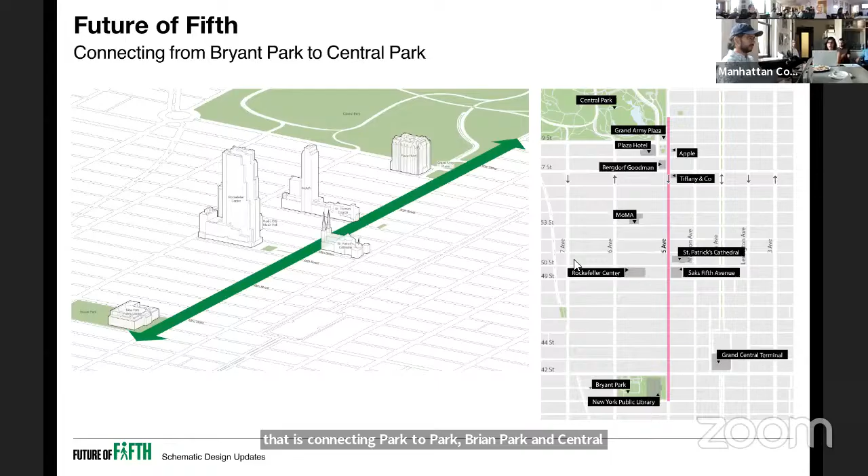Which we like to think about as a project connecting park to park, Bryant Park and Central Park, as one boulevard that we hope can be green and sustainable, as well as iconic and pedestrian forward, as Madeline described. This whole project really came to be as a result of the Making New York Work for Everyone action plan, or the new New York panel.

There was an interest to revitalize Midtown after COVID. And in doing so, there was obviously an interest to revitalize economics, to revitalize retail—you really need to look at public space. How can public space become a catalyst for a lot more investment, and also bring people back into a space that's a lot more comfortable than perhaps the plain sidewalks we see today. So as part of the new New York panel, there was a proposal to make Fifth Avenue, from Bryant Park to Central Park, into a vibrant corridor for pedestrians by expanding sidewalks, improving lighting, and adding more seating.

Out of that initiative is what formed the Future of Fifth public-private partnership, which is all of us here, which, as Alexis mentioned, is a mix between city agencies and the four BIDs that oversee the area, to ensure that we're doing a project that balances everybody's wishes and desires while still addressing some of the corridor's key concerns.

As Madeline mentioned, our first and foremost goal is to prioritize pedestrians. And that is because of the metrics that we see here on the screen. Fifth Avenue's pedestrian volume is on par with the busiest places in the city and around the world. On a given day, during one hour, on one block, we can see over 5,000 pedestrians. That is the image represented here, which is very familiar to all of us.

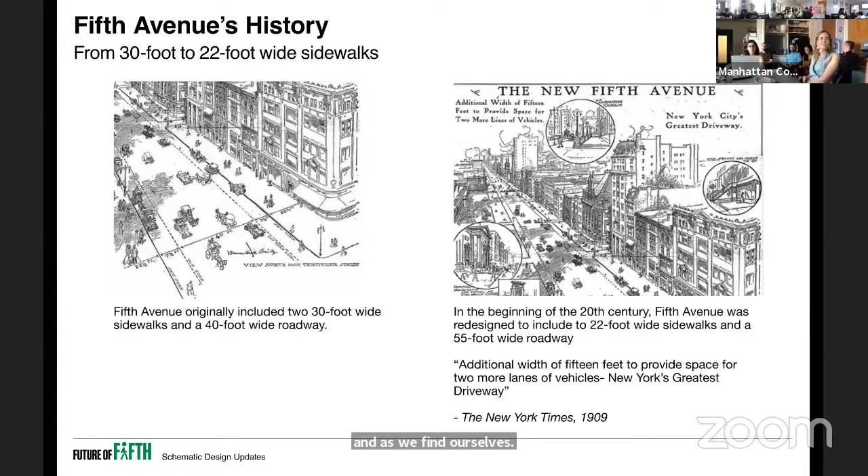And as we find ourselves in this century, we want to revert some of that and bring space back for pedestrians. So looking at the actual proposal with all of that background in mind, this is the existing layout for Fifth Avenue. Just as a reminder, I know you're all extremely familiar with it.

So on the left-hand side, this would be the west side of the street. We have 2 bus lanes. The one along the curb picks up and drops off passengers. The one in the center is an express bus lane. And then we have 3 vehicular lanes. As a reminder, the ones on the far right, or the east, are the more stop and go traffic. The roadway is 54 feet wide and each sidewalk is 23 feet.

But the reality is that because those sidewalks hold bus stops, light poles, trash cans, mailboxes, and other things, the effective clear space for pedestrians is only 15 feet wide, which is very, very small for the amount of pedestrians we see today.

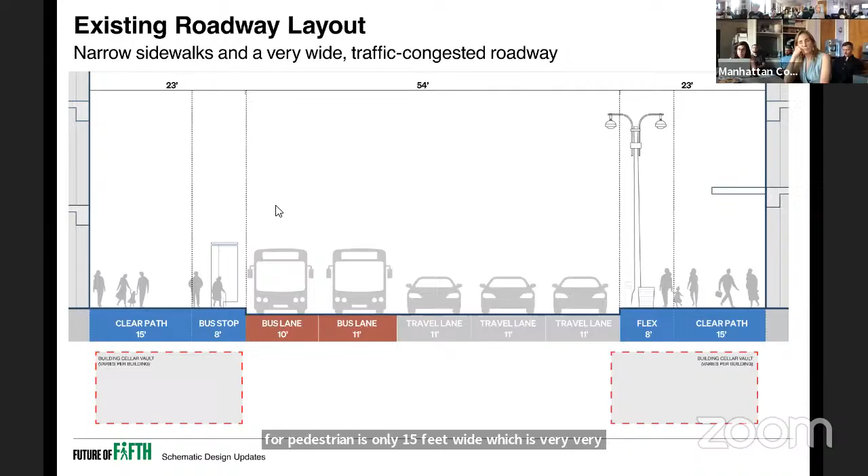So in addition to counting pedestrians, as I mentioned before, we also decided to count everybody else using Fifth Avenue, just to understand how we can rebalance the modes of travel.

So the proposal, after a lot of testing—this didn't come very easily—the current proposal is to reduce the roadway to 33 feet and to enlarge the sidewalks by 10.5 feet each. That would make them a total of 33.5 feet.

The roadway will have a curb lane along the west side. This works exactly as it does today. Either buses pull into that lane to pick up and drop off passengers, or cars making a right-hand turn use that lane, and that will remain the same.

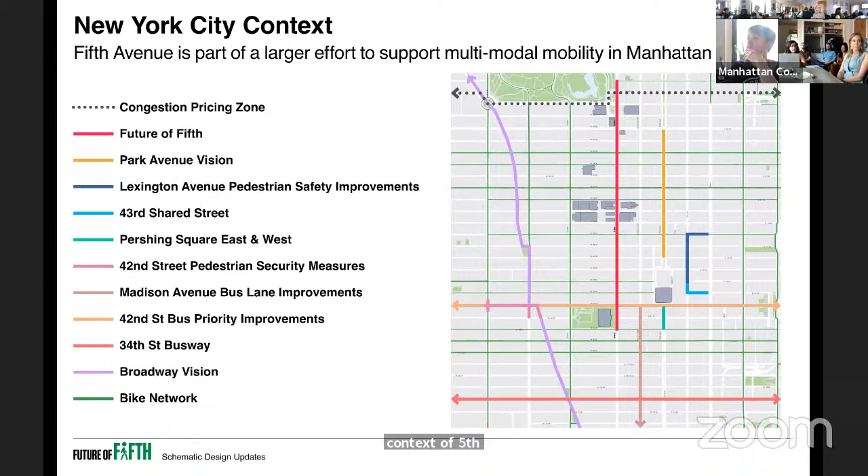Now, keep in mind, the renovation of Fifth Avenue and this proposal to prioritize pedestrians and reduce the roadway comes as part of a larger effort by the city to support multimodal mobility across Manhattan. Here we have the list of different projects emerging at the same time to prioritize public transportation or pedestrianized streets, and ensure a much more multimodal city. DOT is here to speak to those at large in the context of Fifth Avenue, but we want to point out that we are one of many initiatives occurring throughout the city.

Now, this is not all about practical ideas and metrics and counts. We also want the space to be beautiful, iconic, and recognizable. As we set out to develop the design, one important thing for us was to really understand the architecture of Fifth Avenue and think about a streetscape design that felt unique to the place.

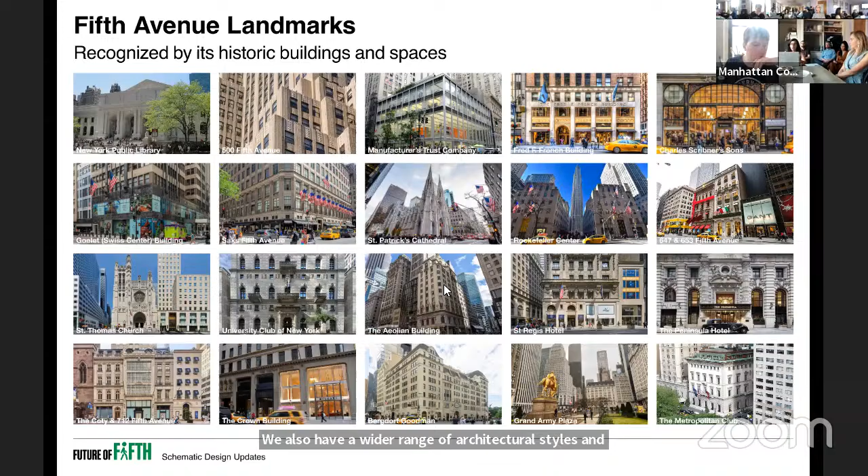We started by looking at all the many buildings on Fifth Avenue. We have a large amount of historic and landmark buildings, with a wide array of architectural styles, materials, and periods. However, what became prevalent to all of us is that what really calls your attention the most about Fifth Avenue today is a uniform materiality. We see a lot of paving with blue-gray tones, mostly granite or concrete sidewalks, and a lot of beautiful Art Deco buildings with Art Deco motifs, also bronze and gold materiality.

So as I'm about to present the proposed designs, the idea is that they're truly grounded in that iconic architecture. Again, we're not doing a project that's only practical to alleviate challenges, but one that's also looking to the future, creating an iconic boulevard for New York City.

So to start talking about the design, this is our key plan, or 20-block vision plan for Fifth Avenue. We're starting at the southernmost edge on 40th Street and extending the renovation to 60th Street. What we recognize out of this project is that we want to create a uniform streetscape, a space that all feels contiguous, but there are also very unique areas along Fifth Avenue that we want to highlight with the design.

So we developed this idea of categorizing the spaces into connectors, piazzas, and gateways. Connectors are the majority of blocks today characterized by retail, mostly 42nd Street to 49th and 51st to 58th. They're extremely important for the livelihood of Fifth Avenue, but you cross them quite quickly. They don't feel like a sense of place. They're needing something to anchor them.

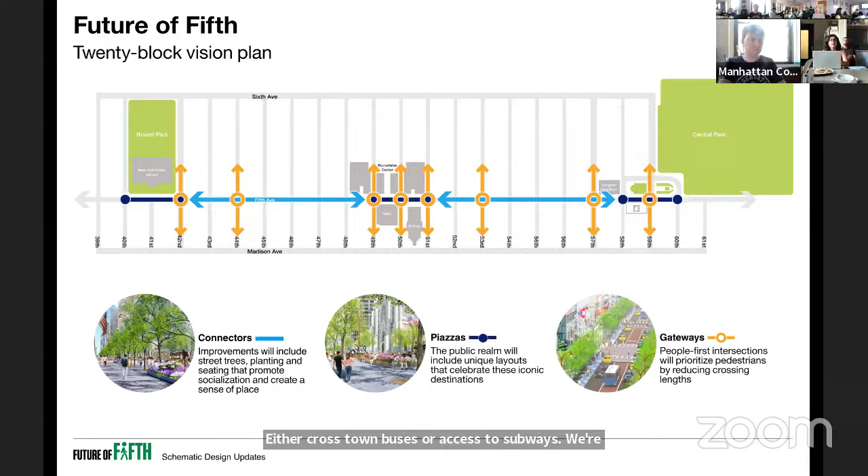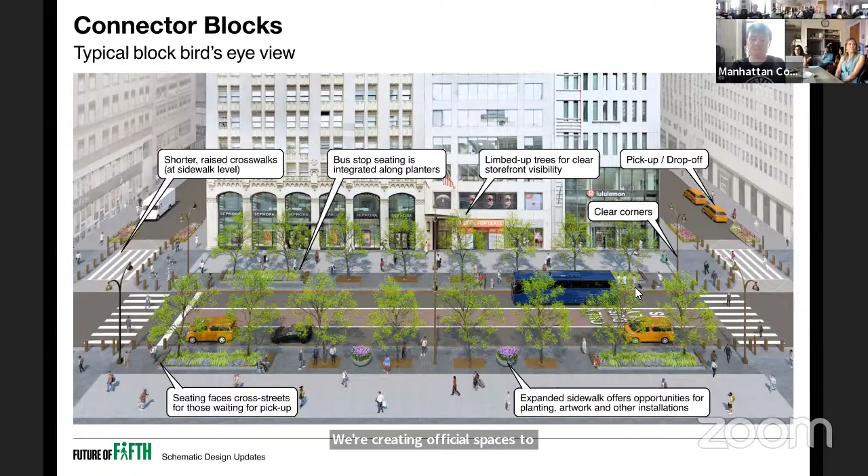On either side, you'll notice how the corners are now bulb-outs. The idea is that we're able to bump out the sidewalk to reduce the crosswalk length. We're also raising the crosswalks to be at the same level as the sidewalk to facilitate mobility throughout. We're lining the corners with bollards to ensure safety on those corners where most people gather. The rest allows the streetscape elements to provide that sense of protection while beautifying the street and not creating more clutter to impact pedestrian traffic. You'll also notice at the top of the image, where we see the taxi cabs, we're working with DOT to create designated pickup and drop-off areas on the side streets. Learning from some of our retailers who have told us this is where people usually get on and off, we're creating official spaces to ensure traffic flow on Fifth Avenue is effective and people can safely access the area.

Another key thing that we've heard from a lot of stakeholders is that Fifth Avenue kind of quiets down at night. Many storefronts close early, but also it feels unsafe. Lighting is uneven—some sidewalks are very, very dark, and some storefronts are a little bit too bright to overcompensate, which is what we see on this image here.

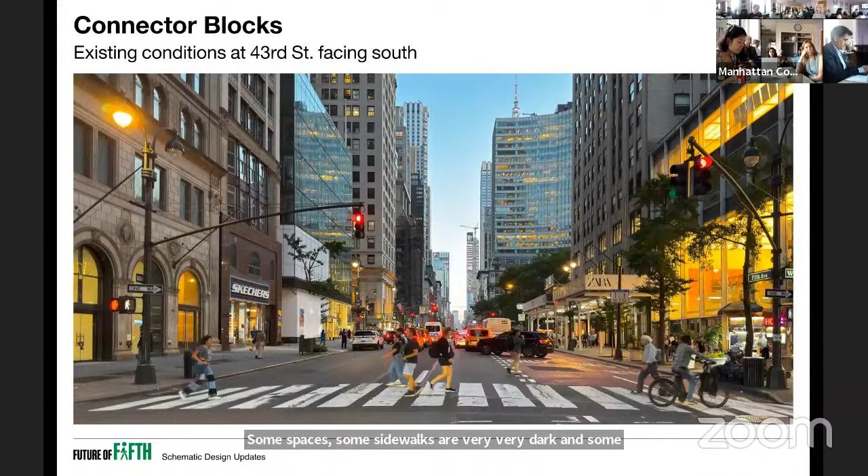We will be upgrading all of the lighting with new light poles that are dual arm. The idea is that they're able to evenly illuminate the sidewalk and the roadway, so the entire width of the corridor feels like one. Again, we're creating uniform lighting that alleviates that issue and hopefully encourages businesses to remain open a little bit later into the night.

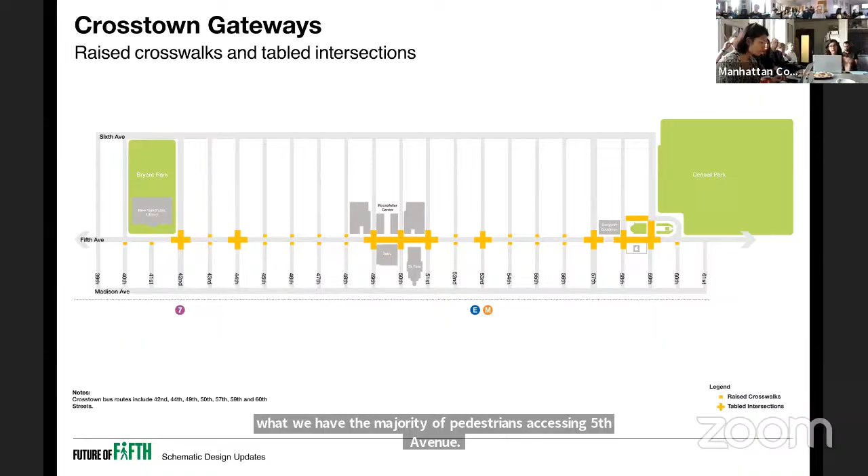Another key initiative is to create safe access points for pedestrians. On this map, we are raising all of the north-south crosswalks in these orange boxes to the same level as the sidewalk. We're also creating areas where we raise the entire intersection, shown as plus signs. This is where we have the majority of pedestrians accessing Fifth Avenue, so we want the entire space to prioritize pedestrians. Metrics show that when vehicles need to go up and down these raised crosswalks, they slow down speeds by 10%, which is really important for this corridor.

In addition, we're proposing two segments that will have curbless streets, where the roadway is at the same level as the sidewalk. That would be between 49th and 51st Street around Rockefeller Center, and between 58th and 59th Street between Grand Army Plaza and Apple Plaza. These are spaces that today are a lot more active for pedestrians and also get closed during the holidays for special events, so we want to facilitate that and accommodate some of the uses that already occur.

Looking at how all of this comes together, under number 2, if you follow my cursor, that's the raised crosswalk at the same level as the sidewalk, so vehicles need to go up and down, reducing street speeds. We see these bump outs again to reduce the length of crosswalks—reducing them between 4 and 11 feet, depending on the width of the side street. On the corners you see a dedicated pickup and drop off area, allowing for better traffic flow along Fifth Avenue, with corners demarcated by bollards to create a safe space for pedestrians while still allowing for easy crossing east, west, north, and south.

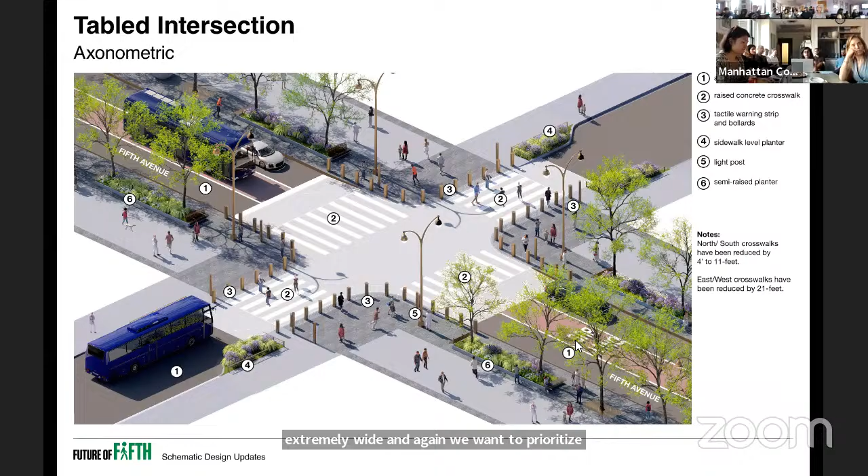This is a typical image of Fifth Avenue today, and you start seeing a lot of the descriptions I was just talking about—a lot of infrastructure, clutter, food trucks, people congregating, not quite fitting on the sidewalk before crossing. Then the proposal creates larger areas where people can wait to cross the street, crosswalks at the same level as pedestrians, and planting on either side, creating a sense of greenery as one approaches Fifth Avenue.

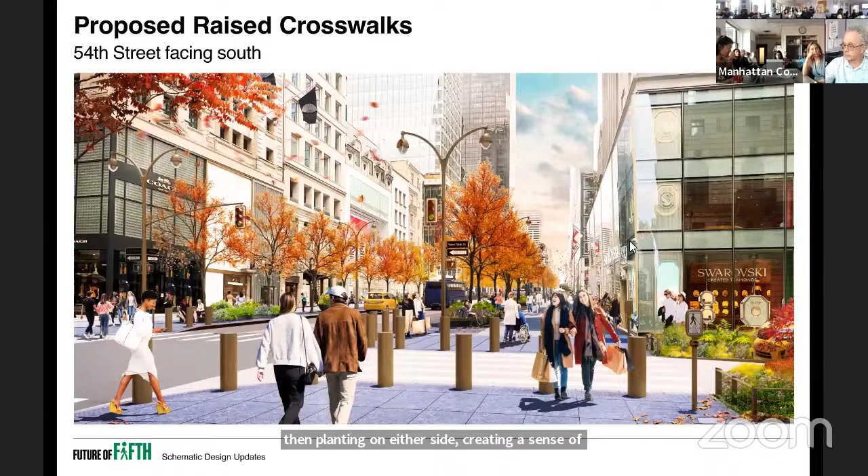Lastly, we have the piazza blocks—those blocks that are very unique today in terms of their use, but also their architecture. We want to use a similar design vocabulary, but also highlight them and honor some of their unique architectural features.

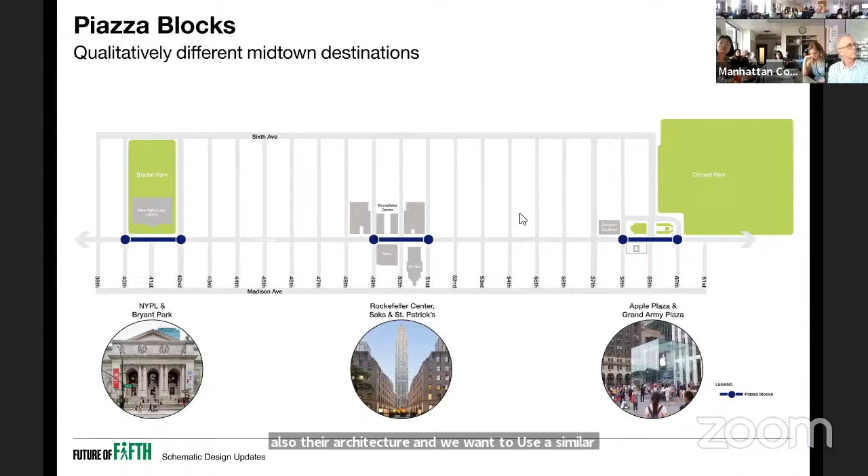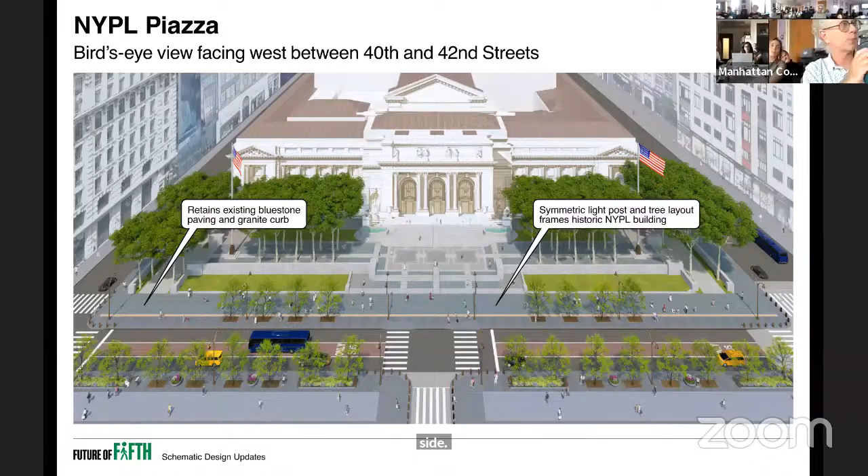Our first piazza block is the New York Public Library. You're all familiar with where it's situated at Bryant Park. What we're proposing, if you notice on the bottom of the image, is our typical block design; on the top is a slightly different design. We're proposing to keep the existing bluestone paving, which is quite iconic, and to place street trees so they echo the same grove of trees on the other side—framing the library steps and creating a sense of uniform canopy as you walk along the sidewalk. Here's an image of what the space looks like today.

Again, those really iconic stone pavers, keeping them on the sidewalk yet expanding it towards the roadway, so we have more space for pedestrians, trees on either side creating shade along the way, and planters including flowers to create a sense of seasonal interest throughout.

The sidewalks here, just to create visual contrast and ensure pedestrians understand where the sidewalk is versus the roadway, will be fully paved in stone. We will be relocating the bollards that exist today to the curb line to ensure we have the same level of protection as it exists today.

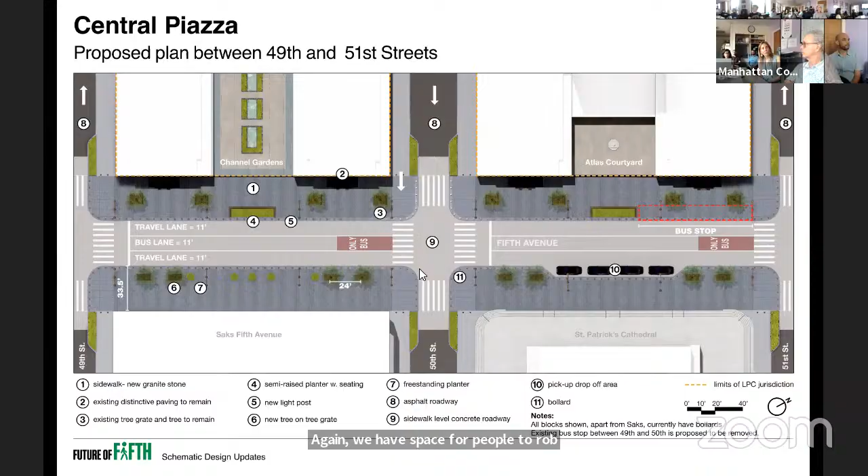This is a bird's eye view looking at the Channel Gardens with Rockefeller in the background. You see how we have kept those existing trees, existing tree grates, the existing stone paving in front of the thresholds, and in this case configured planters differently to actually provide public sitting in front of the Channel Gardens.

We see a lot of people actually today sitting on bollards. They need a place to rest. And again, we're creating a clear view throughout.

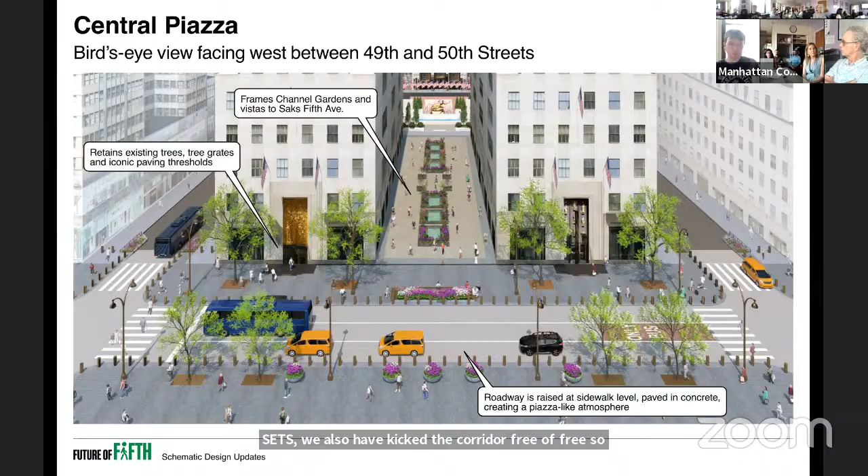In front of Saks, we also have kept the corridor free of trees, so we can encourage that view corridor that's just so iconic within New York City, especially during the holidays.

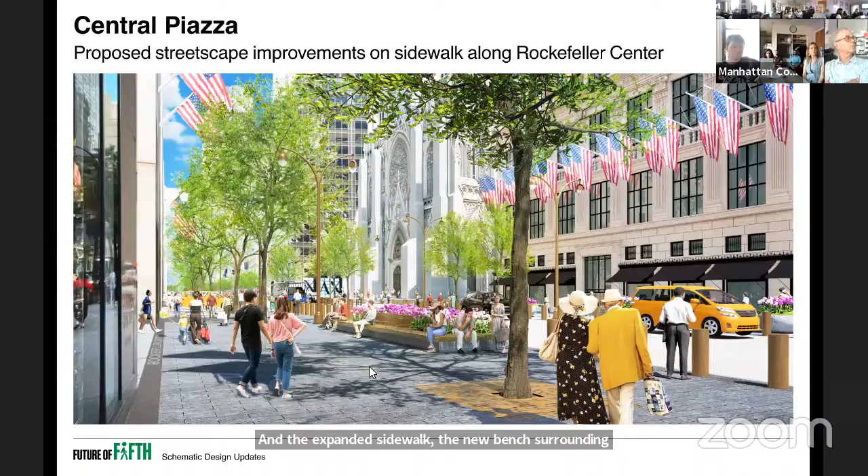So this is an image of what the space looks like today, and the expanded sidewalk, the new bench surrounding planters facing the Channel Gardens, and the existing street trees in the existing tree grates.

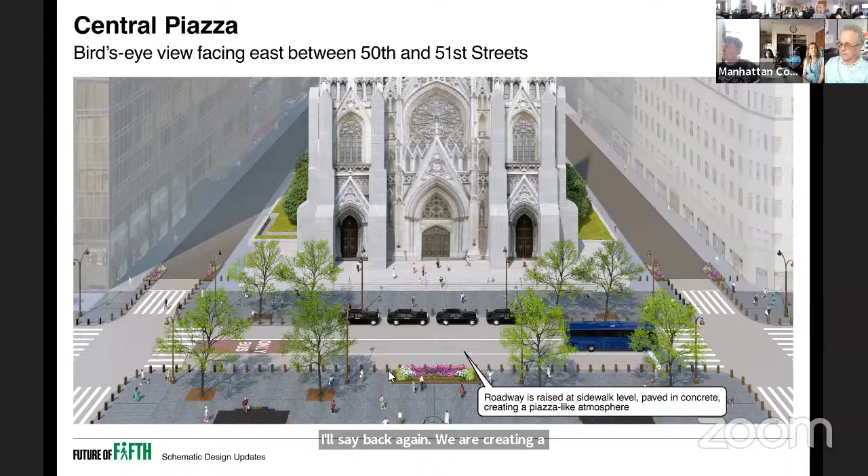Along St. Pat's, again, we are creating a pickup and drop-off area, and across the street, the same configuration in front of the second building of Rockefeller Center.

And then lastly, we have what we call the Northern Piazza. This is the area around Grand Army Plaza.

As you may know, the Southern Grand Army Plaza today is being renovated and restored in terms of its historic footprint. But the areas outside of it today have a bit of a collection of different temporary sidewalk expansions, painted asphalt, and temporary bollards, which really take away from the beautiful upcoming restoration.

So we're proposing to enlarge the sidewalks all around it, this brown-gray area you see, so they're all at the same level as the plaza while still recognizing its historic footprint. This will allow for a lot more pedestrian refuge, since we see a lot of people congregating on the corners to be able to cross.

We're also proposing to raise the street along 59th Street between the two plazas, and between 58th and 59th along Fifth Avenue. So again, we can have a much more urban flow of pedestrians when these areas do close temporarily for the holidays.

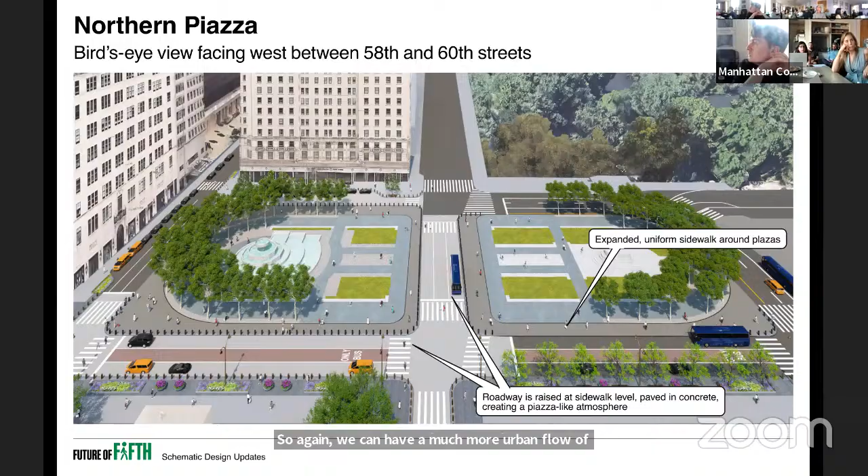Lastly, as Madeline mentioned, we recognize that it's as important to treat the areas you see as well as the areas you don't see. And Fifth Avenue is full of aging infrastructure.

So we've been working for the past six months very closely with Con Ed and DEP to identify the state of all of the infrastructure underground, what is too old that needs to be replaced, what needs to be repaired, to ensure that as we move ahead with this renovation, things happen at once both underground and above ground, and we also ensure that the roadway doesn't get impacted in the future by potential repairs.

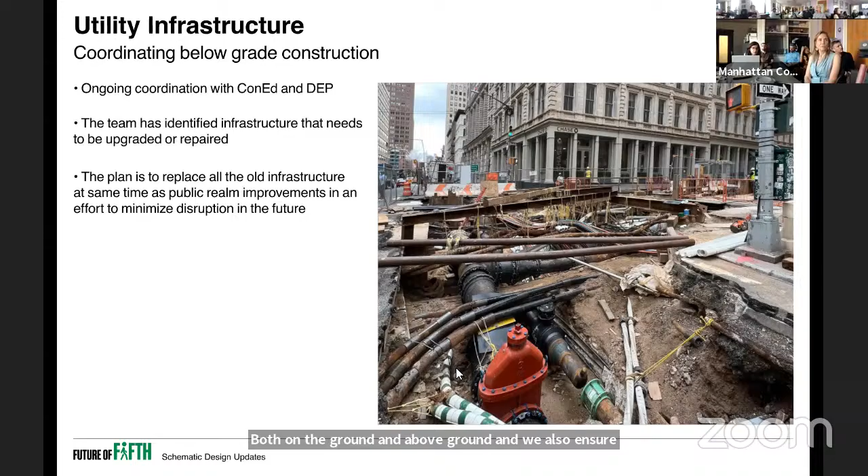To summarize, this is what Fifth Avenue looks like today, and this is what we hope it will look like in the future. We're increasing sidewalks by 46%. We're planting 231 new trees connecting park to park.

We're including over 20,000 square feet of new planters. We're reducing intersections north-south between 10 and 11 feet, and east-west by 21 feet, again facilitating pedestrian movement, accessibility, and ensuring we have a much more sustainable corridor for the future.

So with that, I want to thank you and just open the floor for questions. You can see where the 400 million is going.

Thank you. So we'll start off with questions and comments from the committee, but let me, having had the benefit of seeing this presentation before, raise a few questions and issues as we get into it, and then we'll take it from there. But could you go back to the world-class precedent slide for a second?

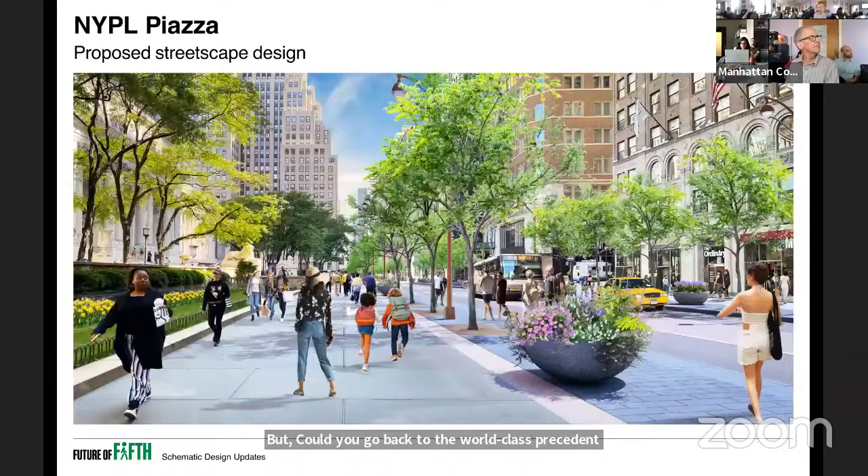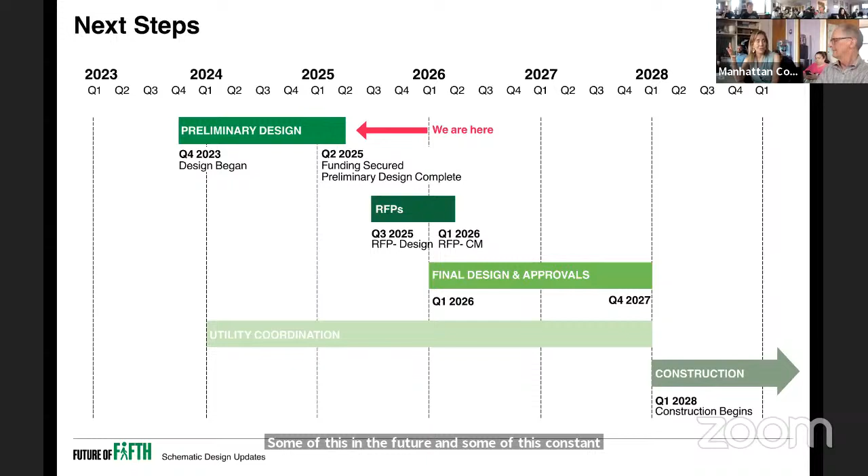We do have a spaghetti down there - 150-year-old spaghetti. We're trying to move as much as we can from under there; there's a lot of infrastructure under sidewalks in general, maybe not such a smart move that it's under the sidewalks. So we're looking at how we can avoid some of this in the future and cut down on constant digging. That's a big part of it. It's hard - we have lofty ideas about it, and even in this moment some get beaten back, but we're still moving forward with forward-thinking ideas about how to really make that congeal in a way the city has never had, because utilities don't coordinate with each other. When you have a street as old as this one, it's a mess.

Just one other thing - public restrooms, did this come up for review in the design? It's not a park, so there's really no space. One of the things we also don't have is real piazzas or real public spaces up there - aside from named parks like Central Park and Bryant Park, the avenue itself has no real public space, so it has to be provided elsewhere. There are buildings on Fifth Avenue that do provide public restrooms, but we don't have any room there. That's a comment we get everywhere, whether it's for POPS or other spaces - we actually looked into it, but it just didn't fit.

Is there a goal to move private cars off of Fifth? Originally this was proposed as a busway, so it's not quite that, but it is 25%, or whatever, 40% less than it was before. So is there inherent in this design a goal to move private traffic off of Fifth? Is that what makes the numbers work?

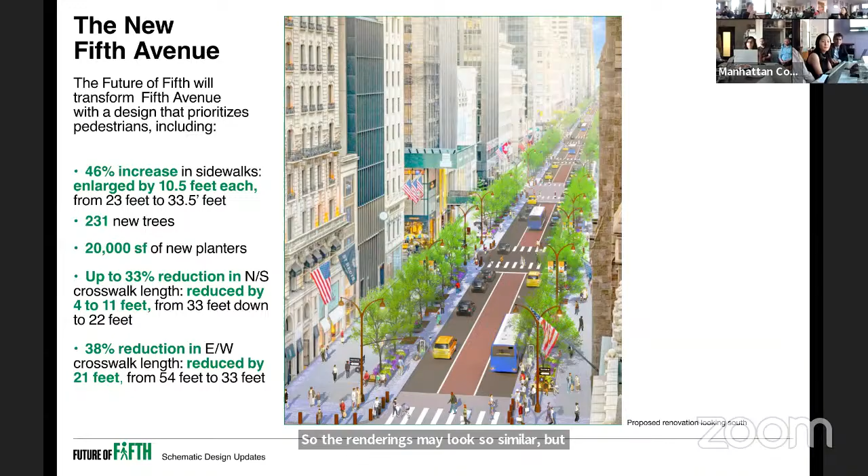And then on slide 7, I have a couple questions—it's all about the buses. The process, yeah.

When it says that the proposed design will not significantly change the current bus capacity, what does that mean? What it means is that we're not proposing anything that changes how the corridor works today. You still have your dedicated express bus lane, and you still have the same number of bus stops. Could it be optimized? Right now, some blocks have 4 bus stops, and some lines stop on every single block, which sometimes contributes to traffic. Those are conversations we're looking to have with MTA to see if there's a way to optimize that, or understand that certain blocks receive more passengers than others, and do something to facilitate their operations and make them move more efficiently.

This is an interesting subject, and as somebody who takes public transportation every day, I'll tell you, some people say 'oh, you must not take public,' but I take it every day. One of the first things I heard when I agreed to be part of this project was how many empty buses there were.

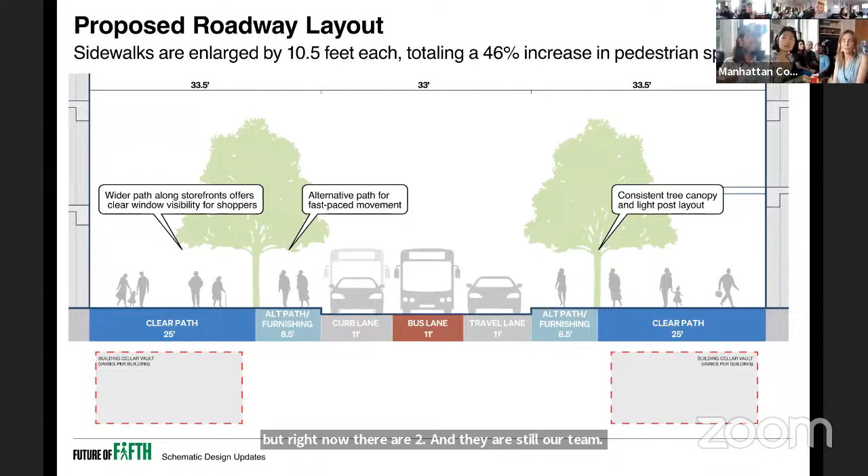So I just want to clarify, you said you're not reducing the number of bus lanes, but right now there are 2. There still are 2. I only see 1 in the... No, there's 2, the curb lane. If it's a shared lane, it's not a bus lane. It's a shared lane right now, exactly like it works today. So today you have your dedicated bus lane for express buses, and then the westernmost lane where buses either pull up to bus stops or vehicles cross over to take a right-hand turn. It's working exactly as it is today. Where we are reducing lanes is the travel lanes on the east side.

Okay, so why is it not still red, why are we changing it? Because a lot of people hate the color red. They feel the paint wears off over time quite quickly, and it leads to an aesthetic of disrepair. So we're also trying to create a streetscape that can have easier upkeep and look a bit nicer aesthetically. So the middle lane will still have that disrepair, just not 2 lanes?

We're working on that. David said they're trying different ways of doing it. In London, they mix the color into the asphalt, that helps, for example.

Just to clarify, from an operational perspective, that curb lane of Fifth Avenue isn't changing tomorrow. As Isabel said, the majority of that curb lane today, while marked as a bus lane, is actually a bus stop. Bus stops are typically red, they're marked bus lanes, it's red, and then right turns to side streets happen. So from an operational perspective, there was no change to the third lane and no overall change to bus operation.

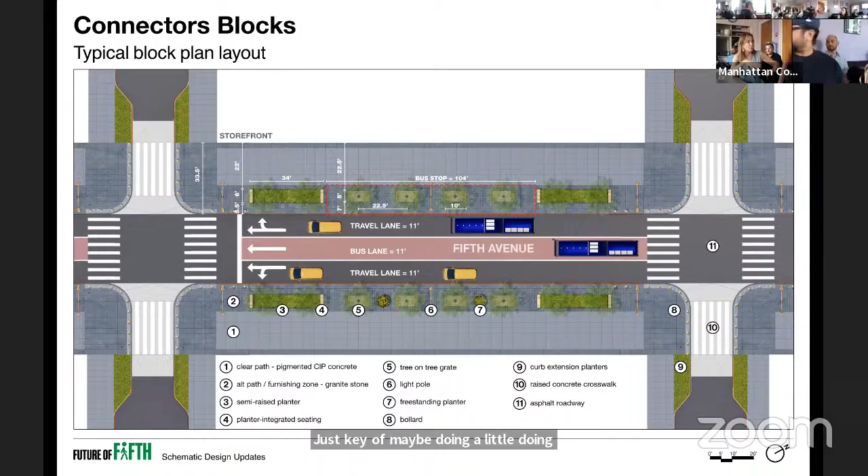We've had a lot of success during the holidays, other than weather not being great. It's hard doing it because it's December, but we've had success closing the street. We've done a lot of parties - not public events, just free stuff and all that. We're exploring this year maybe doing it a little calmer, not doing so much, but just closing the streets on Sundays during the holiday this year. So it's really more like just trying to get more people, New Yorkers, to come and enjoy it. We don't do events - there's already 11 parades right now on Fifth Avenue.

Well, people have very strong opinions about that, both ways, but I think as time goes on it becomes a little bit more problematic, both for counterterrorism and for everybody else who's trying to get around. But I don't think we're going to plan on doing that many more events. I think the holiday season is important - it's a time that everybody just likes to come, see the tree, be there, and we try to figure out a way to accommodate more people doing that.

Are there any plans for - it seems like there's not that much change to the status quo plan with what's happening right now, with closures maybe during the holiday season. Are there any plans for maybe seasonal installations that would happen along the space?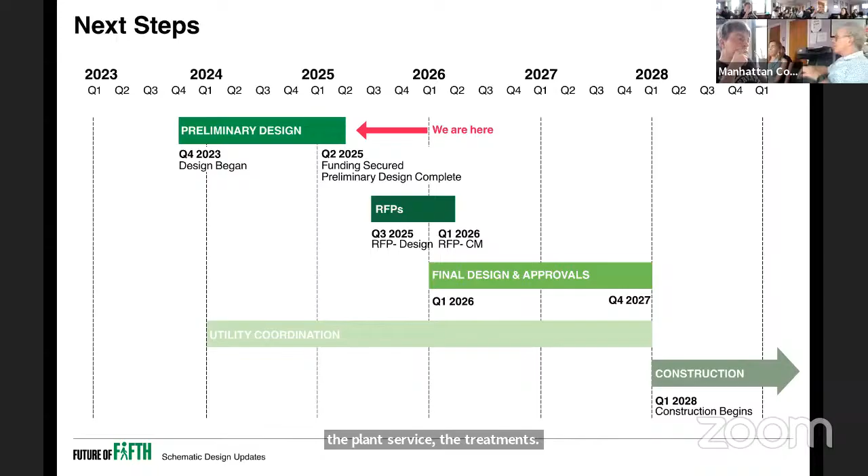I have a question that really can't be answered until you get under the ground, but it's based on some discussions I've had with urban planners and planning, with some models down in Coral Gables and some things over here. So the question is, would you consider, in addition to the planters and tree pits, tree corridors, which could give us so much climate resilience?

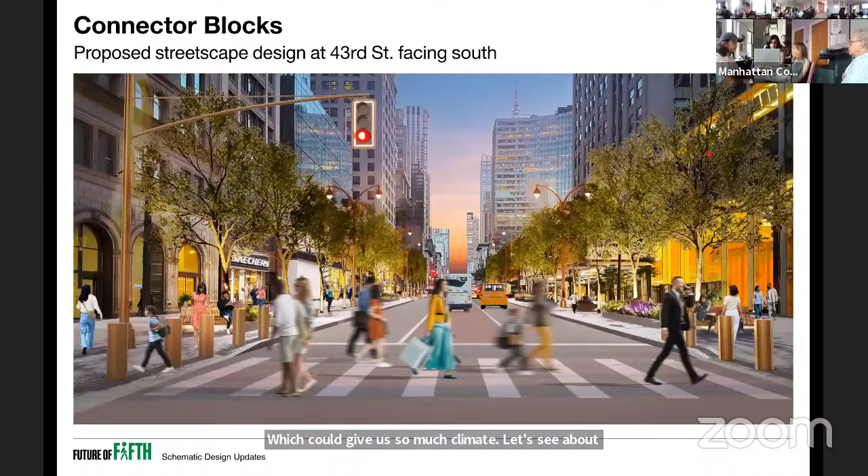Already done — let's hear about that. I don't have an image of it, but here's what we're doing. This entire area where you see all the trees, this dark gray area, will be soil underneath the pavement. All of those trees are interconnected and have sufficient soil volume to expand beyond the planter you see. But the other thing they do is collect stormwater — that's fabulous. Underneath that entire pit we're going to have 12 inches of gravel, so as soon as those trees don't need the water, it goes into that gravel bed.

I'll be very honest, we don't yet know where that goes. We're still doing tests to understand if the subgrade can actually absorb that, or if it needs to be sent back into the storm system. Either way, this really minimizes flooding, because when there's a rainstorm the trees absorb that water first, as opposed to shedding it all to the drainage system — like Miracle Mile in Coral Gables, which after that hurricane was back in business within a week, whereas others took a year. So we're doing the same system they have on Miracle Mile.

Is it permeable pavement? Not permeable paving — water will percolate through the tree grates or the planters. The issue with permeable paving is that you need to vacuum it quite often, and with the amount of foot traffic we have here, that would be even more. I think the BIDs have carefully analyzed what they're able to maintain, and this goes a little bit above and beyond.

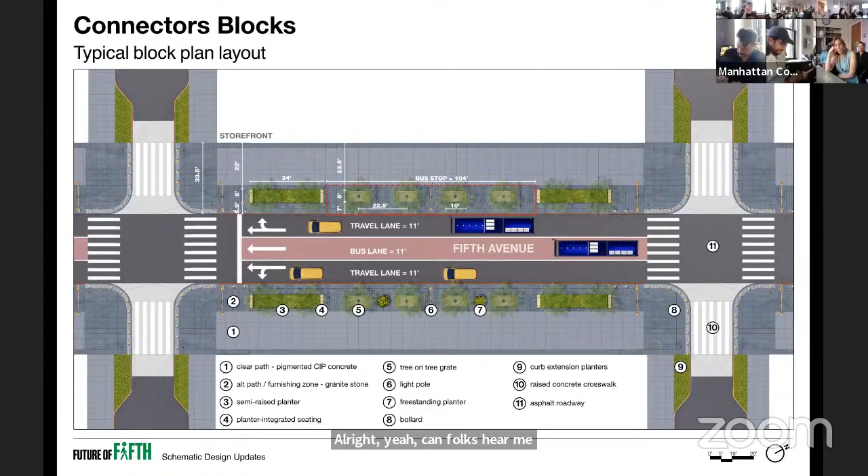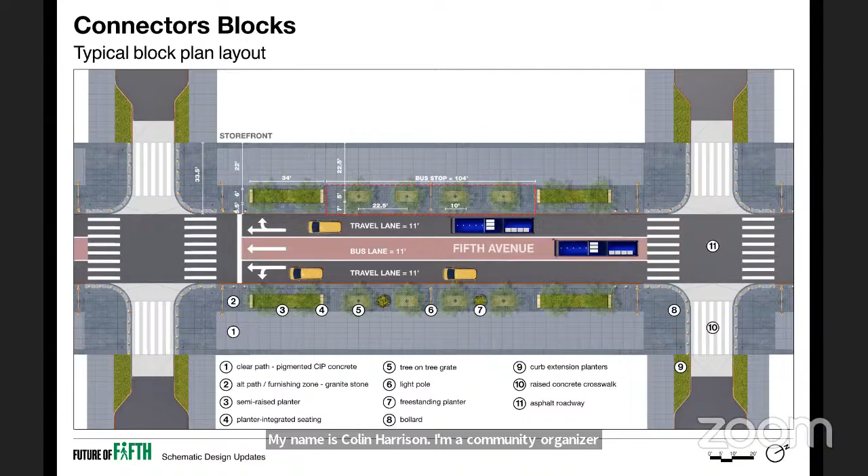My name's Colin Harrison, I'm a community organizer with the Street Vendor Project, and I work with a lot of the vendors in the area of Fifth Avenue. I know there's been a lot of discussion among them. Unfortunately, no one was able to join this evening from the vendors themselves, but I just wanted to ask the project team and maybe also hear from some of the community board members if there's been any discussion of accommodating vendors in these new plans. A widened sidewalk and a larger, more inviting pedestrian realm is something that will invite people to sit and spend time.

I think vendors are an important part of that realm, providing a cold drink, a warm coffee. I know there are parts of this street closed at different times of the week and year, but there are also parts of Fifth Avenue in the project zone open for vending, either part-time or full-time. I'd love to hear what considerations have been given to that. I reached out earlier to the community board to try to set up a one-on-one meeting. Many of the vendors are not English speakers, so a forum like this might be difficult for them. I'd love to know if there's a chance to sit down and make sure their voices get heard. There are also business owners in the area who contribute to the local economy, contribute to that large tax base that comes out of Fifth Avenue you were talking about earlier. Thanks so much.

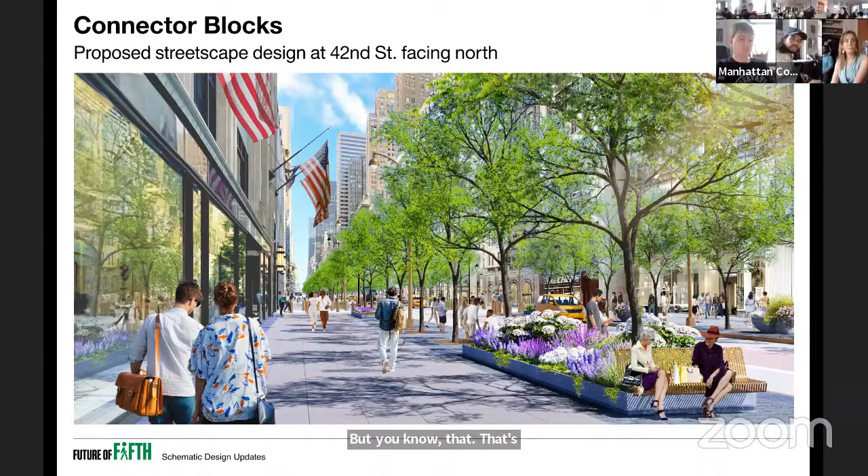Hi, Jim Wright, Community Board 5 resident. I use the sidewalks here as a pedestrian and also a bus rider, local buses on Fifth Avenue. I do not bike because it feels completely unsafe at this point. So it's a little bit disappointing that the bicycle lane was dropped from the plans.

As shown earlier, one of the compensations mentioned in some earlier presentations of this project, of the current phase, regarding bus lanes, was that the city would be looking very seriously about a north-south bike lane on Sixth Avenue as compensation for Fifth Avenue. And just as a reminder, there is no southbound bus lane or bike lane between Second Avenue and Seventh Avenue in this area. So it is really deficient in terms of bike infrastructure.

So I feel like if the city is dedicating $400 million to a project like this, there is a real responsibility to look beyond the actual boundaries of this project and look at it from a larger planning perspective, and solve some of the other problems that may not be dealt with by this project and maybe even negatively impacted. So that's my comment about bike lanes.

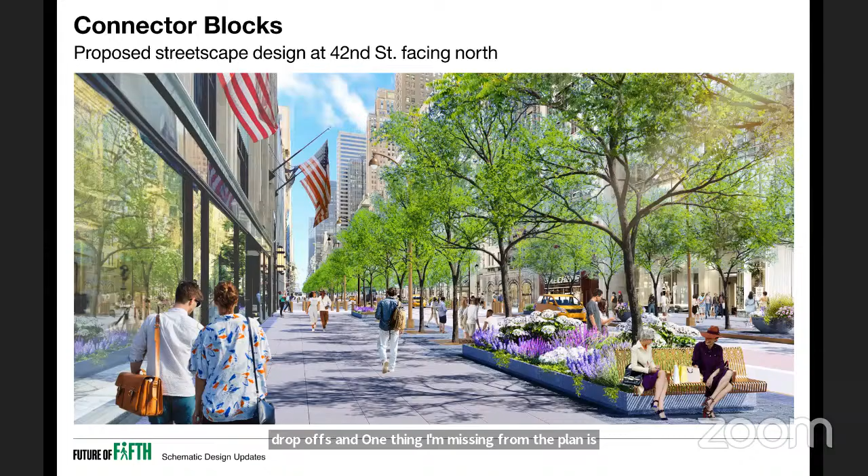And the third comment I have is I don't see any accommodations here for taxi and for-hire vehicle drop-offs. And one thing I'm missing from the plan is what happens on the side streets on both sides. I think there needs to be accommodations for drop-offs of taxis and for-hire vehicles, and an acknowledgement that the right turns really are what's slowing down the bus lanes.

And I hope that there's a real serious discussion going on with MTA. I keep hearing promises about talking to the MTA, but I haven't heard them directly involved in these discussions. So those are my comments. Thank you.

I'll try to respond to your points in order. Please jump in if I missed anything. Your first point about making accommodations for the bike network is entirely correct and very much in keeping with DOT's broader goals for the area. As I mentioned earlier, we presented plans for a Third Avenue protected bike lane earlier this year, and we plan to install it later this year, so the downtown protected bike network is getting a big boost on Third Avenue.

Your second question was about bus lane enforcement. Yes, it's very much included as part of the proposal, not just for this project but the bus network broadly. Onboard cameras will certainly be part of the current thinking. Enforcement technology is going to continue to evolve, and by the time this project is realized, enforcement is certainly part of the plan.

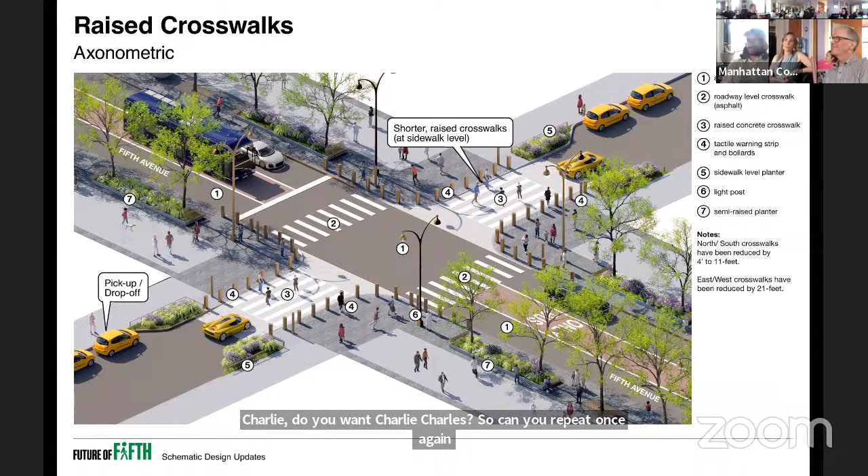The motion is to write a resolution that says we support the project. However, we would like to see a bike lane, even if that means taking out an additional vehicle lane. We would like to level out the entire street for the entire corridor, not just the piazza section, so it's curb to curb. We want to see more public comment, similar to what we saw at the CUNY Grad Center. And we also would like the DOT to take their 2021 plan off the shelf and implement it now, so we have some improvement until construction starts in 2028.

What about Samir? Hold on, yes. Would you be open to discussion?

Obviously it makes sense what you're saying, the fact that we want an answer to the big question. Since we're gonna be drafting this anyways, I'd like to open up the solution space for how we're going to answer it, because someone just mentioned that using Sixth Avenue might be a valid resolution, so that we can provide some options for how this could be viable. This could be one option, maybe Sixth Avenue, et cetera.

If you're okay with that, we can change it to say we would like to see a real solution addressed.

To address the real bike solution issue, to the bike problem, so that we can avoid accidents - yes, real answer to that question. And then the last thing I'll say is that, to your point David, about a kind request to be involved in this process again at a later point in time when the RFP gets issued. I think that would be helpful to the resolution as well.

I'm sorry, to be involved when the RFP gets issued? I think that's what we just discussed. Just to remind all of us that this is supposed to happen, I think it would be helpful to document that in writing for when we're supposed to have a conversation.

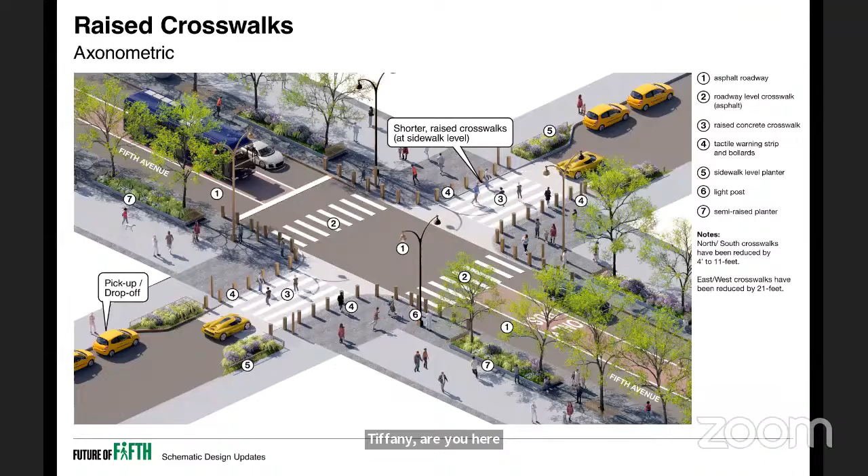I'll vote in favor. Alice, favor. Ankur, I'm in favor. Christopher, yes. Karen, yes. Tiffany, are you here? Yeah, I'm here, yes. David, yes. Kelly, yes. And Brown, yes. Passes, 1, 2, 3, 4, 5, 6... 11-0-0.